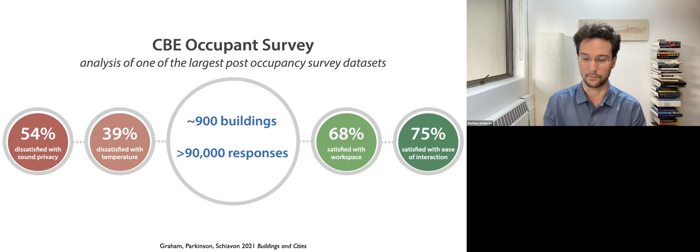We did something similar in Singapore, and in this case we mainly focused on a high-end office environment, and the results are slightly better, but the main idea is the same. Here we have three-quarters of the people that are still happy with their space, and we have large dissatisfaction with the temperature and with privacy.

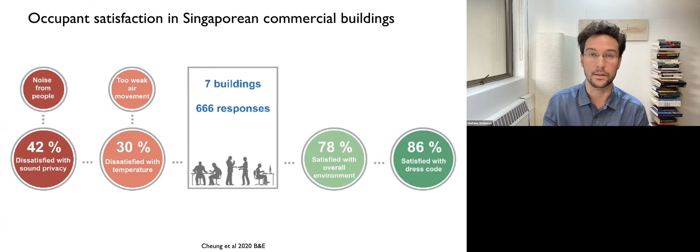This is not a new result. We've been seeing this trend for almost 20 years now. Roughly 10 years ago, with the emergence of certification programs like LEED, we expected to see an improvement, because we had the hope that by verifying whether a building meets the criteria for which it was designed, we would find a higher satisfaction level. Unfortunately, we found that even in highly certified LEED buildings, the ones that got the highest certification, we did not see a substantial difference compared to buildings that did not have certification.

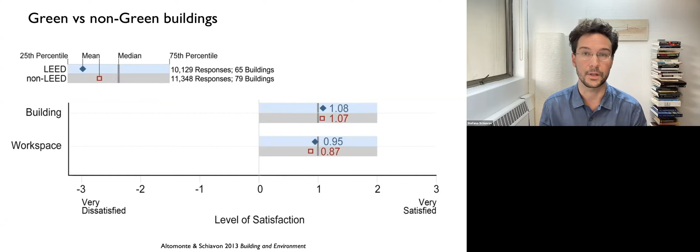So what can we do? We are in a situation where buildings use a lot of resources, are among the most important assets that people, corporations, and nations have, and many people work in them. They use a large amount of energy, and still we have many people who are unhappy about those environments. There are many potential solutions, and today I'm going to present one that we've been focusing on here at the Center for the Built Environment and in Singapore over the last 10 years.

The idea is that we should not create the same environment for everybody. Right now, we get the same temperature, we tend to get the same relative humidity, and often we get the same lighting and air quality conditions throughout the space. But we are different. We have different needs, we have different expectations, and we should personalize the environment. We developed the concept of personal comfort systems.

These are devices that instead of focusing on conditioning the entire space, focus on conditioning people. Here you see a couple of prototypes. We have a foot warmer, we have a desk fan that has an occupancy sensor, so people, if they feel hot, can turn it on and off.

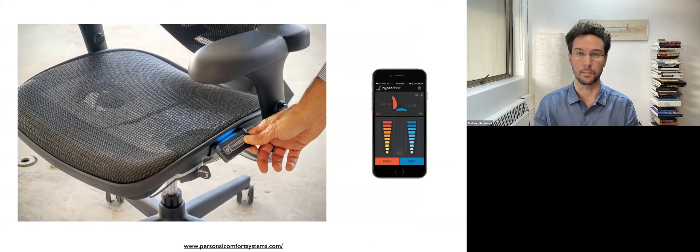Some of these products try also to go to the market. We tested this product both in the lab and in real buildings. What I'm showing here is an example we did in Singapore almost 5 years ago, where we brought a high number of students into a room and gave them a fan. We started our experiment in a typical indoor condition in Singapore, around 23 degrees.

We found that only 85% of the people were satisfied. When we increased the temperature and gave them a fan, the satisfaction went to almost 100. When we removed the fan, with the same temperature, satisfaction was reduced to 93. Then we got to an even higher temperature set point, and again the fan was providing more comfort than the case without the fan.

Why did we increase the temperature set point? We increase it because that is among the most cost-effective ways to reduce energy consumption in buildings. We've been studying how to make better buildings for a long time, and increasing the temperature set point in summer and decreasing it in winter is among the easiest and most cost-effective solutions we can imagine.

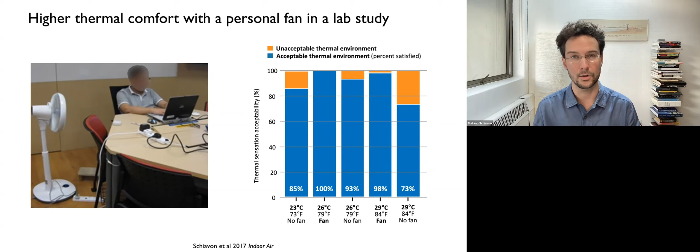But if we do that, people will be uncomfortable. So fans in summer can be used to cool people down. In this experiment, we learned that people are happier when they have access to a fan, and they also use less energy. We tested this also in a high-end research office environment in Singapore.

This is the R&D office for a large corporation in Singapore, and in that case they already had the fan installed. In this case they were not personal, but they had granular control - basically one fan was conditioning up to 1 to 4 people. And also in this situation, we noticed a significant increase in satisfaction.

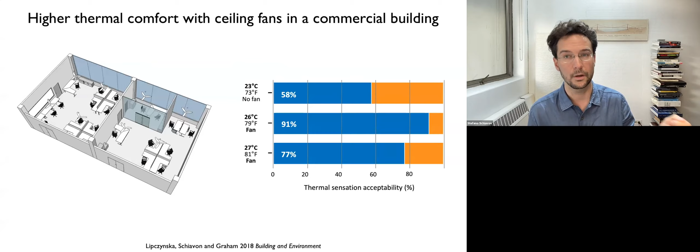In the baseline condition, only 58% of the people were happy. When we gave them the fan, we increased satisfaction up to 90%. So in this case too, we increased comfort and reduced energy consumption. This is the issue of personal comfort systems - devices that can condition people locally.

Another problem we are facing is that the model we use to control buildings can be outdated. For example, here we show some evidence about the most common thermal comfort model that is used out there - it was developed more or less 50 years ago. The idea behind it was that people were tested in laboratory conditions, a model was built, and then implemented in the real world.

There was no approach where the information or model developed at that time was adapted to specific conditions. Moreover, this model accepts 6 input parameters. Among them, some are very easy to measure, like temperature, but others, like clothing and metabolic activity, are very difficult to measure in a real environment. So most of the time they are just assumed, and we end up controlling buildings just based on temperature and relative humidity.

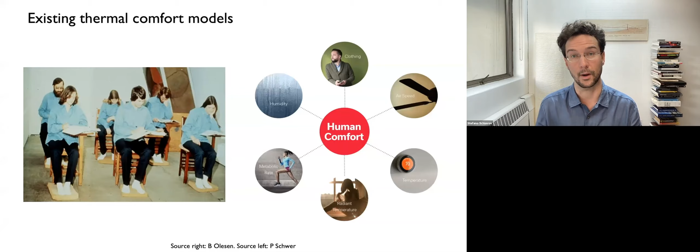We wanted to change both of these situations, and we introduced the concept of personal comfort model. These are models that can accept different types of input - basically whatever is available, we use it to develop the model. And the most important aspect is that they learn over time. So if new information or evidence comes in, or we have access to it, we can update them and tailor them to the specific needs of a person or group.

This type of model can be applied to commercial buildings, to residential buildings, but it can be applied also to other building environments like cars and airplanes.

A personal comfort model is a new approach to thermal comfort modeling that predicts individual thermal response instead of the one of an average population.

One of the largest flexibilities of this approach is that it can accept different types of input. It can accept physical parameters, environmental factors like temperature, relative humidity, outside temperature, amount of rain, and amount of solar radiation.

But it can also accept the occupant behavior pattern. For example, how people use the Nest thermostat, or the feedback that people give on an app to say if they are comfortable or not. This type of approach can also accept physiological parameters like heart rate or skin temperature.

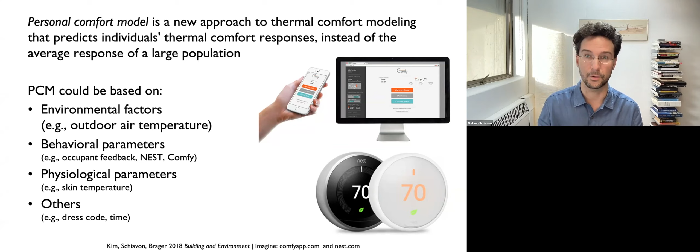And we've been doing research on all of these different types of input. Now I will go over some of those studies.

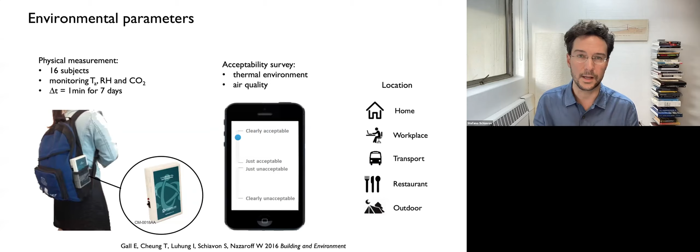Five years ago, we attached a sensor to a group of people in Singapore, and we followed them for a couple of weeks. We measured CO2, temperature, and relative humidity, and we asked them what they thought about the environment. When we tried to relate the physical parameter to their feedback, it was difficult to find a pattern.

But when we tried to develop a model for each person, then we became much better at predicting what they wanted.

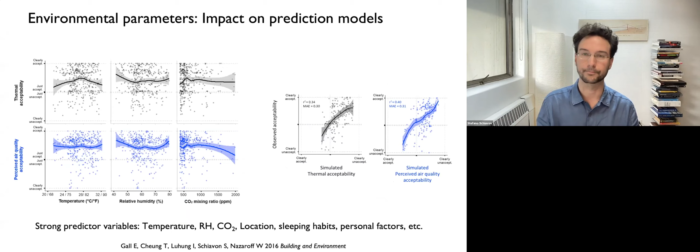In another situation, we have this heated and cooled chair, and we equipped roughly 40 people in a commercial building here in California. For a couple of months, we observed how they use the heating and the cooling.

In this case, the input to our model was the ability of people to turn on the local heating and the local cooling. With that information, we were able to predict very accurately what people wanted.

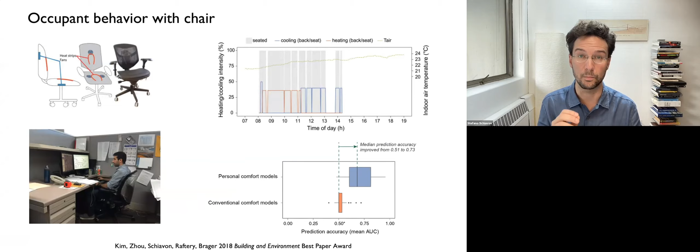We also tried to go even closer to people. We've done studies where we have a wearable device measuring heart rate, skin temperature, near body temperature. With those, we get close to people and we were able to predict their thermal sensation quite accurately.

This type of model has proven to have a higher prediction accuracy than the more traditional model. They also have proven to be very flexible and to adapt to the type of input that are available in a building. But unfortunately, they tend to require a lot of data.

So recently, in collaboration with a colleague in Singapore, we were able to develop a concept of cohort comfort modeling, where we develop, based on previous knowledge, some model, and then based on specific characteristics of a group, we can apply this model to them.

For example, if you are a person that tends to prefer cooler environments or tends to prefer warmer environments, then we adapt a model that was developed for that cohort. And then if data are available, we also allow them to get updated.

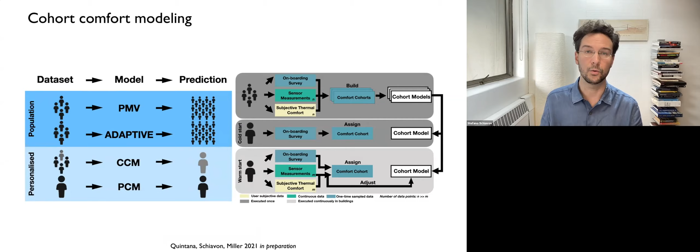Until now, I focused on predicting comfort, providing a higher environmental quality. But does this system save energy? The answer is that not necessarily.

In some conditions, yes, they save energy, and we are focusing on solutions that save energy, but not always can this be achieved. But if the right personal comfort system is selected, then we can save energy.

Here in this graph, I'm showing the idea that I described before: the fact that if I increase the temperature set point and provide an energy efficient solution for people, then we can obtain substantial savings. We are testing this idea in Singapore, and recently a study was concluded by a colleague.

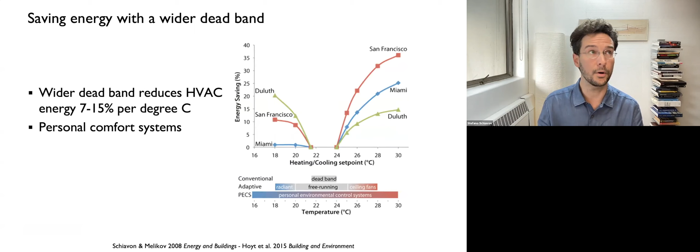Here at the Center for the Built Environment in the Central Valley in California, for more than two years we observed 13 air-conditioned zones, where at the beginning they just had air conditioning and kept the temperature at the typical 23 degrees Celsius.

And then we gave them fans. What we noticed is that, first of all, people tend to increase the temperature set point in the environment, and we obtain a substantial energy saving.

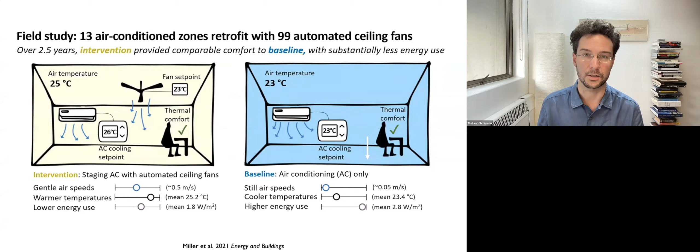One limitation of this approach is that many of these devices require people giving feedback. Here we have an example of a company that was a spin-off from Berkeley and now has been bought by Siemens. In this case, people say if they want warmer or cooler, but that tends to distract people.

So we've been studying a solution where, instead of asking everyone to give feedback, we have a kind of monitor at the entrance of a space where people can say if they are happy or not about the environment. This is something similar to what you find in airports or in restrooms around the world.

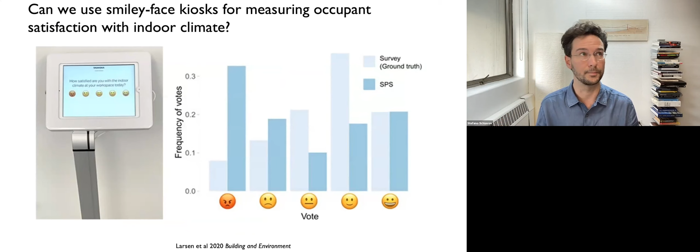Another problem is related to the fact that if we ask too many times, people will stop answering. We've developed a solution where we ask questions only when we need that information, when we don't have enough understanding of how people will behave at a specific, for example, temperature range.

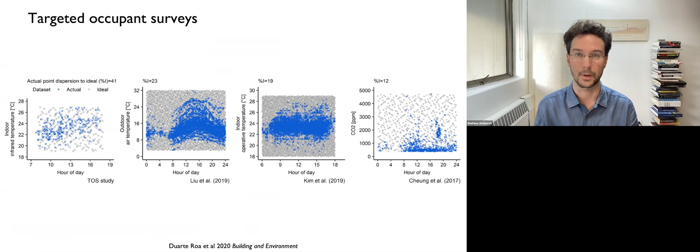So until now, I've given you some evidence that people are not very happy in the built environment, and a solution that could be applied that at the same time increases occupant satisfaction and also reduces energy consumption. In the next part of my presentation, I will spend some time describing some of the barriers that may exist in buildings.

One approach we applied for improving the smartness of a building is to apply machine learning to existing sensors. Basically, we have a stream of data coming out, for example, from an energy meter or a lighting meter, and then we try to extract information from them automatically. Usually, the more sensors we have, the better. But I think there is a limitation to this approach.

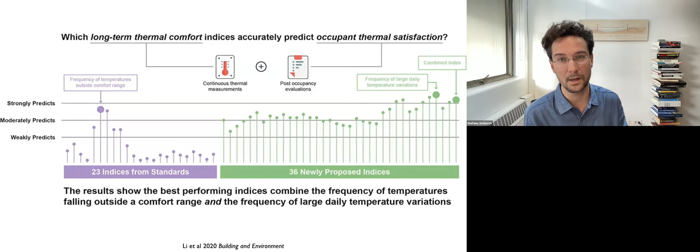Unfortunately, this idea cannot be applied to all existing buildings right away, because we will need to go one by one and implement it.

Another problem in buildings is that there is not enough design automation. Our industry is extremely fragmented, mainly composed of small players that have loose relationships among them. And that has resulted in buildings not being designed in an efficient way.

We design buildings almost in the same way we were designing integrated circuits in the 1960s. We are not very efficient, and we could apply some of the ideas developed for electronic design automation, like platform-based design developed by one of the next speakers, Alberto Sangiovanni-Vincentelli. This can be applied to buildings, using standardized elements and standardized ways to put them together in order to create unique products.

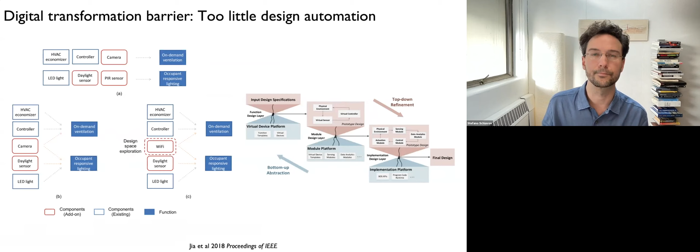The last barrier is the one that worries me the most, and it's related to building codes. Buildings are designed based on specific building codes, and these building codes were developed before we became a global community. Building codes are different almost at every state and often different at every county.

We have a permit process that happens at the city level. So a building that can be built in Berkeley may not necessarily be allowed in San Francisco, and most probably will not be allowed in Reno, Nevada, and almost for sure cannot be built in Paris, France. And that is kind of unacceptable.

We do not expect that we design cars differently for every single city, or that every city has the right to approve or not a specific solution. We need to create more homogeneity in the standards that we have, and we need to have the permit process move from the city to at least the state level, and even better to the federal level.

Given that approval is subject to the people reviewing the process, this process is inconsistent. The same building may be approved once in Berkeley, but with a different committee it may not be approved another time. So developing codes that can be automatically assessed for compliance, and making that more homogeneous throughout the country, will allow a higher penetration of the digital transformation revolution.